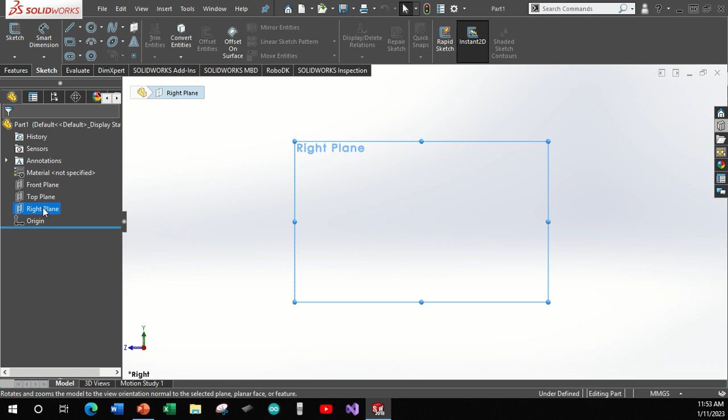Okay, in this video we are going to design a bearing, and the size of the bearing is 55. 55 is inner diameter, 68 mm is outside diameter, and 7 mm is thickness of the bearing. So we draw this at right plane. So Z axis should be on the right side, right? So let's go for the sketch.

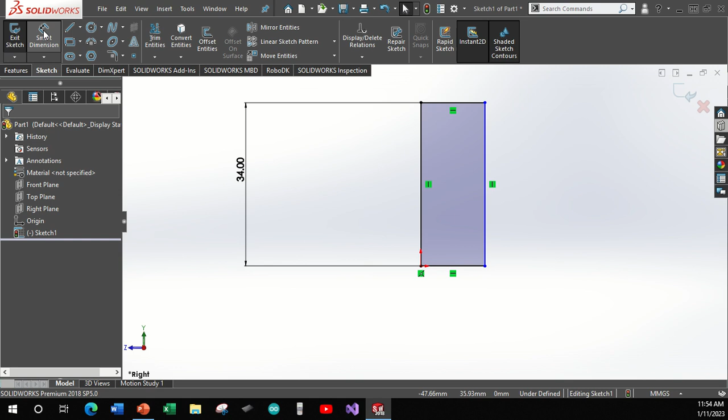Let's use the rectangle tool. Okay, so the dimension of this size should be 34. 34 times 2 is 68 mm. So this one, the thickness of the bearing is 7 mm.

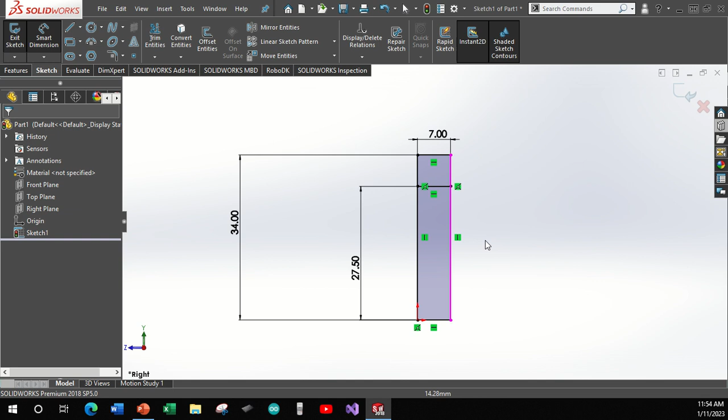So now I have to make a line for the inner side. So the dimension, this will be 27.5, because 55 mm is the inner diameter in the bore.

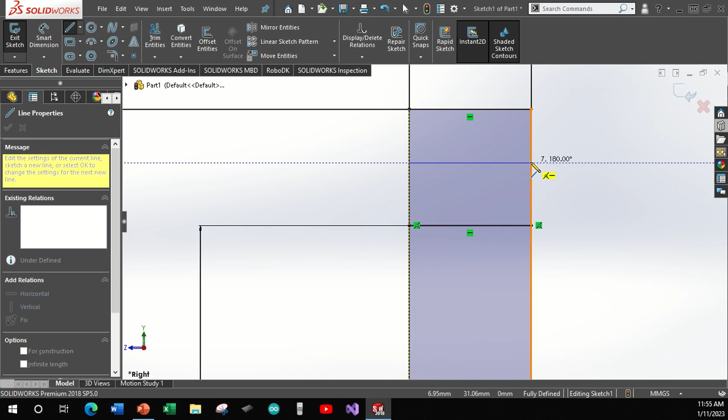So now I have to make a circle for the bearing. Let's make it 3.27 and make it a construction. So let's have a circle. The ball bearing is of 3 mm, so I'm gonna have 3.3. It's a tolerance according to my printer, so 3.3 mm is okay.

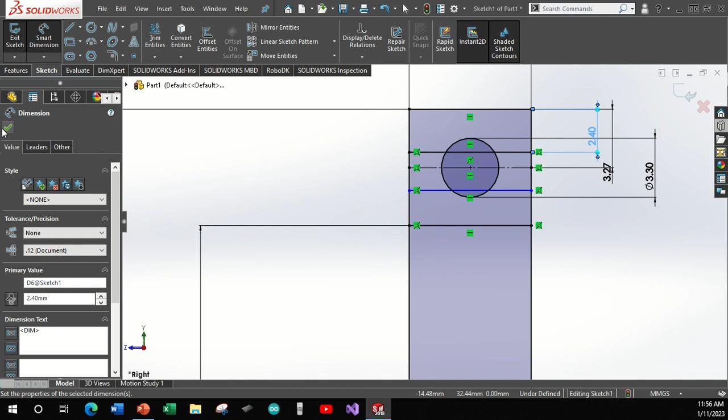I need two more lines, one here and one here. Let's have the dimension of these two lines. It should be 2.4 mm, and this should also be 2.4 mm. So this is now okay, and this is close.

Okay, what I'm gonna do is actually I have to make it a bit - remove this one, make it 6 mm.

I have to design the middle cage. So the spacing between these two is 0.37 mm, and the spacing between this one and this one will be 0.33 mm. So this is not close. Let's close this one, this one, 0.5.

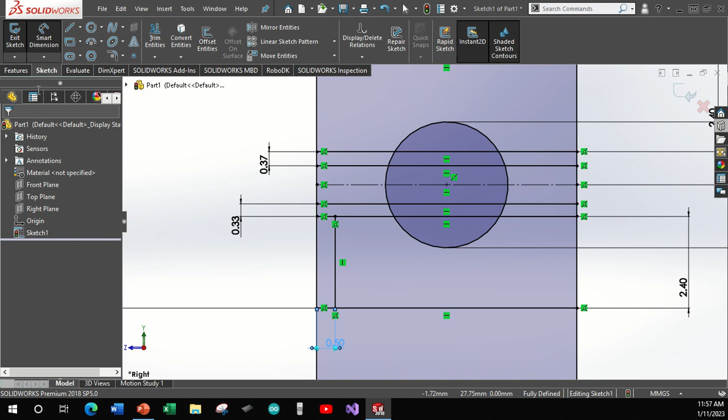So let me trim some areas. I'm going to trim this one, trim this one, trim this one, trim this one, trim this one, and okay, trim this one as well, this one, this one, this one, and this one, this one, and this one.

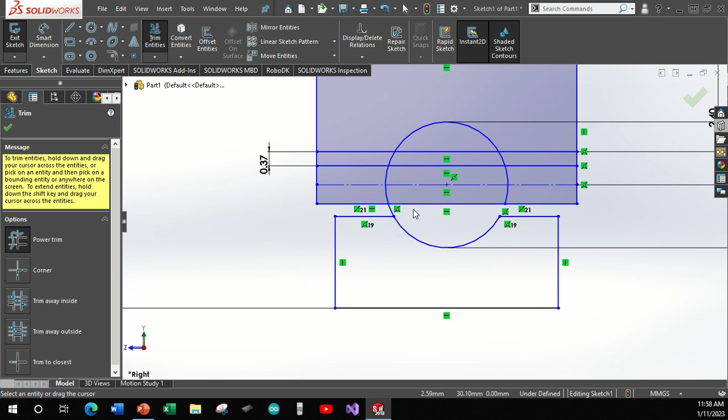So this part is actually the inner part of the bearing, right? So let's go to the outer side. Remove this side, this side, this side, this side, and this side. So this is the outer side.

So I have to now complete the carrier of this bearing. So what I'm going to do, I'm going to take this one from here to here, so I'm going to trim these entities. This is okay.

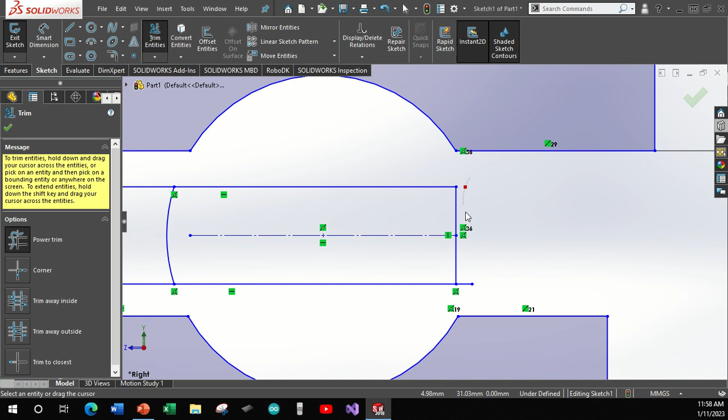Let's show the dimension of this one. It's 1 mm, it's okay. This is of 1 mm, and I have one more line.

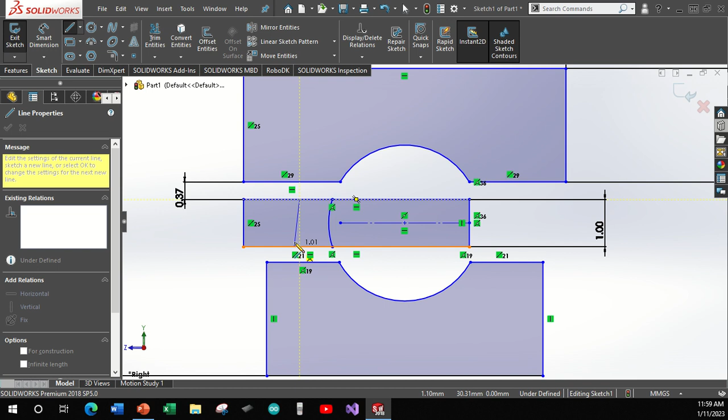I take the dimension of this and this circle. This should be of 2.75 mm. So let me trim these entities, also trim this one and trim this one as well. Let me cross check the dimension of this one and this one. This is 1.4, it's perfectly fine. So this part is the outer ring of the bearing.

This is the inner ring of the bearing, and this is the balls carrier. So this bearing can actually carry 3 mm ball. So I have chosen the diameter of the circle as 3.3 mm, for the tolerance and according to the printer, you can adjust this one, right?

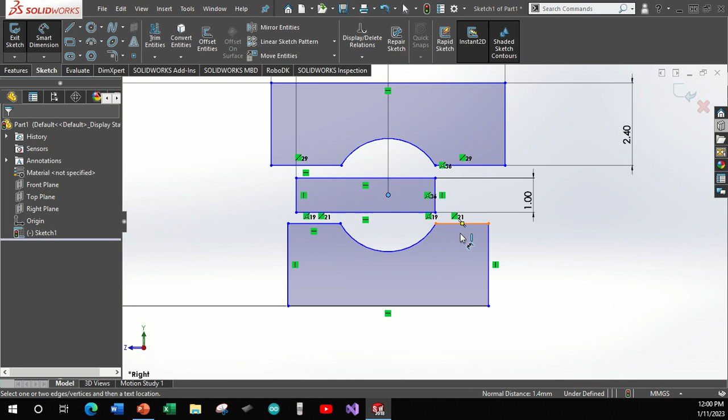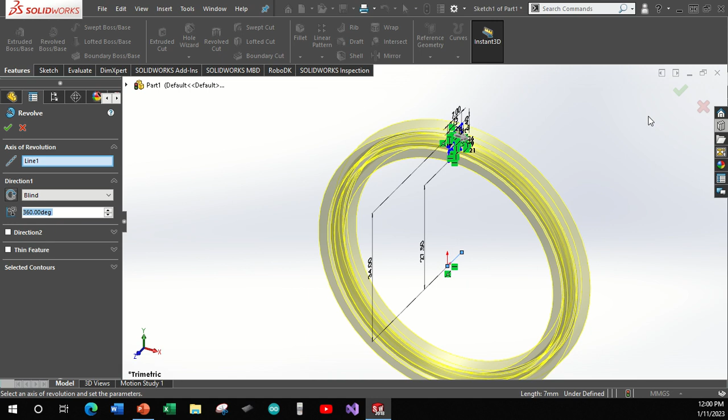So now let's actually revolve this one. Let me just trim this in - no, I'm not going to trim this one. Instead, I'm going to make it for construction because I will revolve around this one. So it's called revolve, and then it's okay. So this is a bearing, right?

55 cross 68 cross 7 mm. So I have kept this, I have kept some distance. I have kept the thickness of the outer ring as 7 mm, inner ring as 6, and the carrier has a lesser thickness, so that there should be no friction or body contact between this bearing and this bearing. So let's say this one.

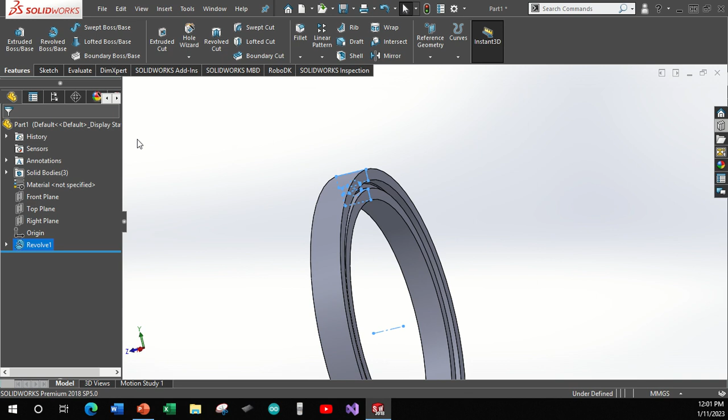Let's say, let me just have a new bearing 55 cross 68 cross 7. So bearing 55 cross 68 cross 7. I have to split the three parts, and I also have to make a cut from where I can insert the balls, right?

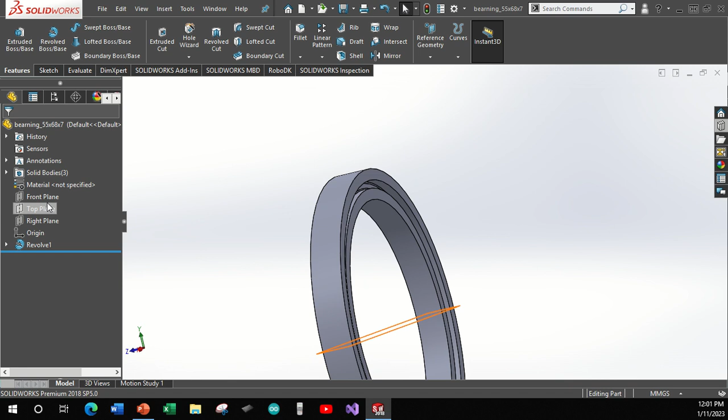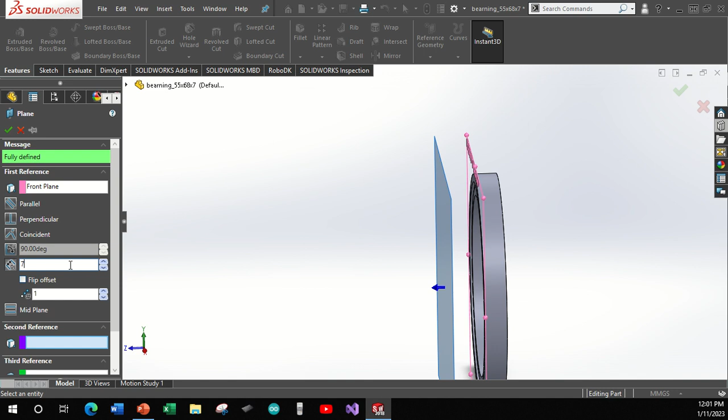So let's just go this one, either this side, or what I can do is actually reference a plane. The next plane should be at 7 mm. The direction is exactly opposite this one.

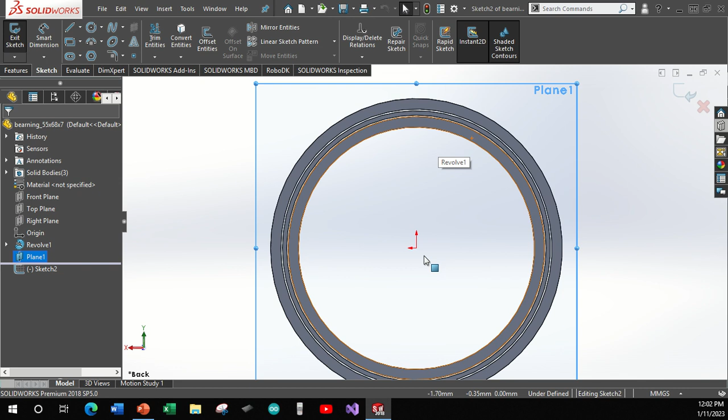So plane, this is sketch, we have normal. So the outer is 68 minus 55 is 13, divided by 2 is 6.5.

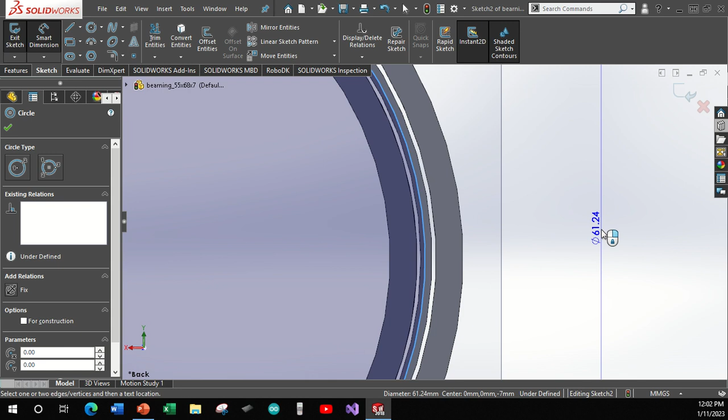I have to draw a circle for cut, something like here. So I was doing calculation, 68 minus 55 divided by 2, 6.5 plus 55 is 61.5. So let's make it 61.5, and choose actually construction for this one.

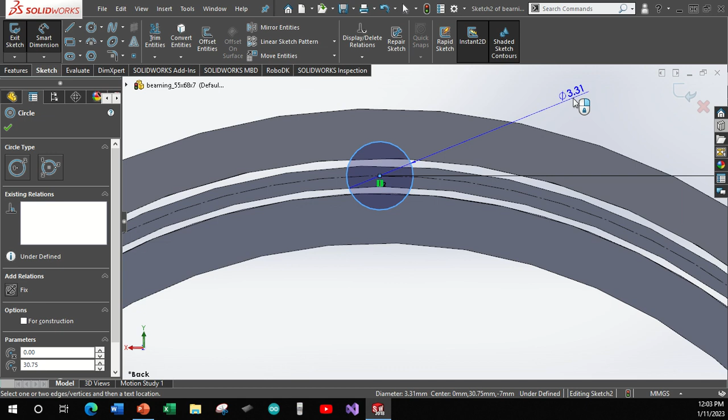And now I have to choose this one as - this is also 3.3, it's okay. Let's choose a cut. Extrude cut, and in this direction this should be of 3 mm approximately so that it can cut the surfaces - 3 or maybe 5.

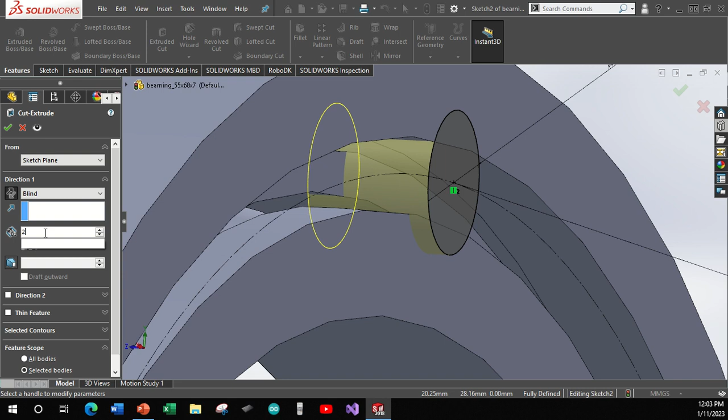No, actually, I will not cut here. Let's leave it for now. Let me save this file first. Save as inner outer, because I'm going to make a change in this one.

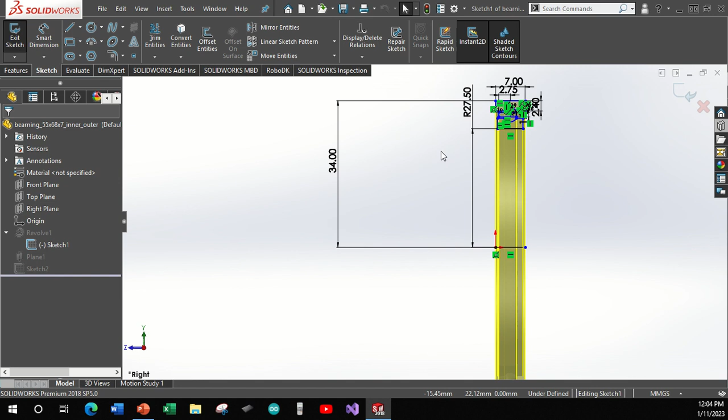Sketch, first take this one, edit. I have to make a cut for balls to be inserted, so I'll remove the inner carrier. Okay, so now we have only the inner and the outer side.

So sketch, edit. This is a feature, cut. This is 3 mm, this side. Okay, so now I can easily insert balls from here, right? This is okay, so this is inner outer.

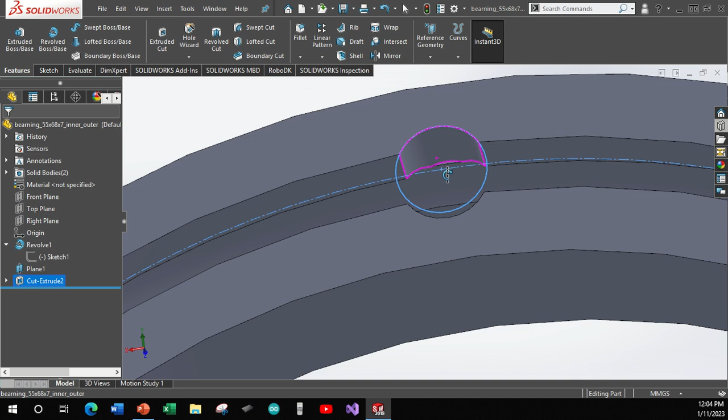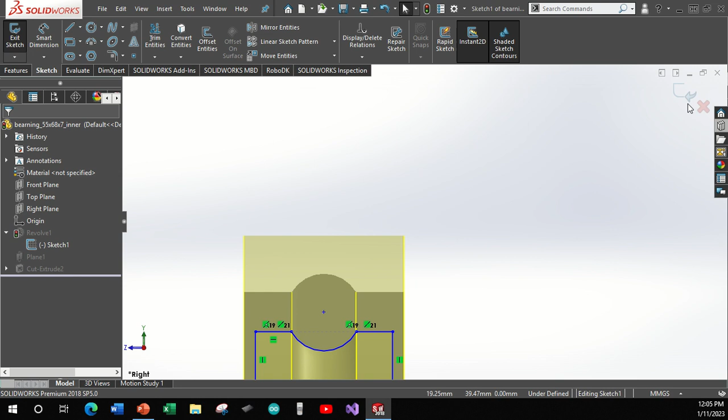Choose save and save as. So go to STL and then okay. So inner side is done. So let's go for the outer side.

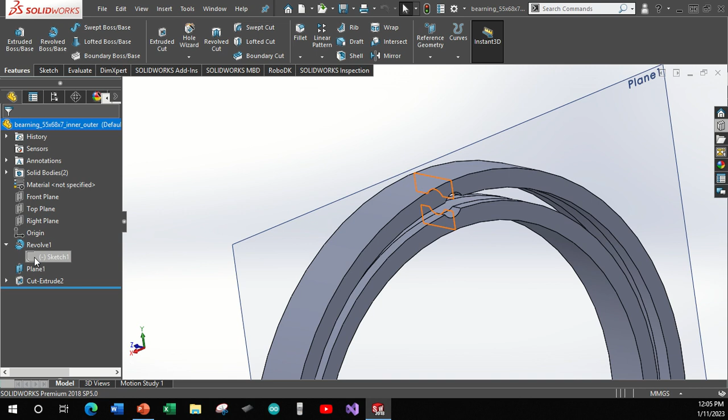So okay, so this is inner. Let's go to the inner outer. So this is inner outer. Now I have to extract the outer side. So sketch. Okay, so trim increase, oh sorry. So I have to trim this one there, but I have to extract the outer one. Done.

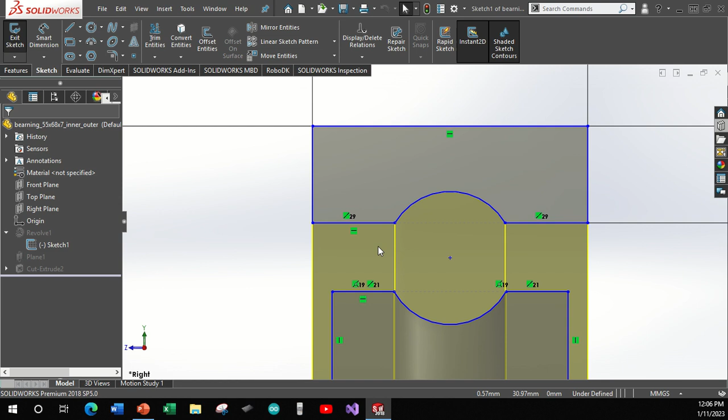I think there's a cut that I'm saying. Let me just first save it. Save as, only the outer ring. So this is the outer part.

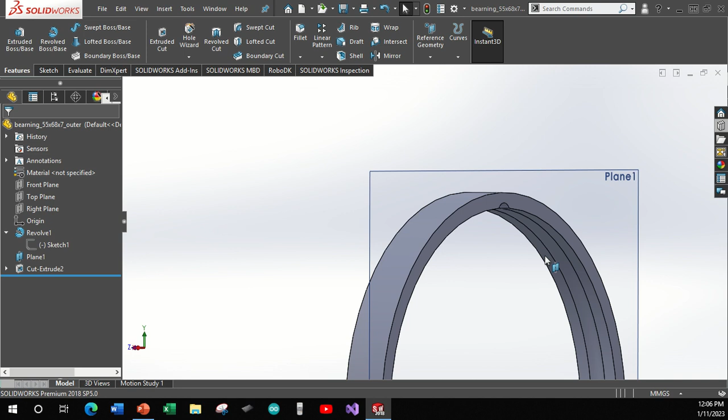So let's save this one. Save as STL, and this is the outer part. Now we're done. So I have to take the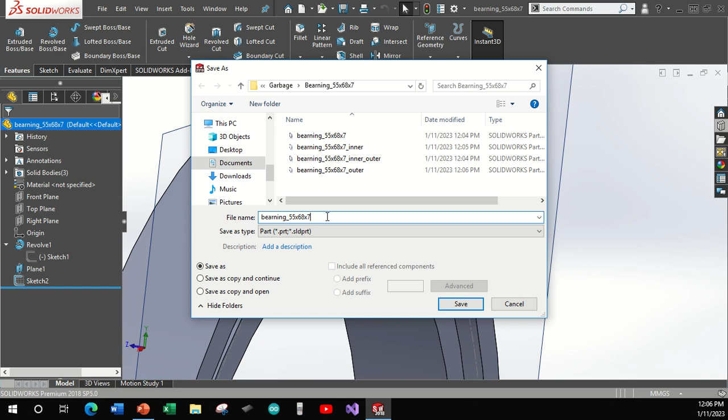Sketch and save as carrier. So this is carrier of the balls. Sketch, edit, trim. Okay, so trim all of these entries. These entities will be trimmed.

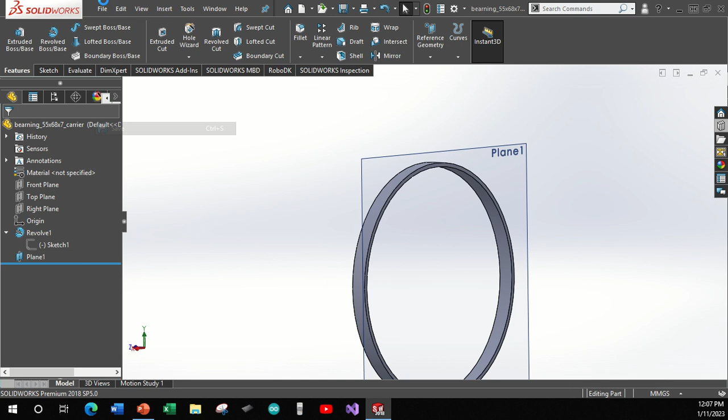Okay, so I'm left only with this. I don't need this anymore. So for this one, yes, I delete. This is save. So right plane. Okay, so this is the right plane, and

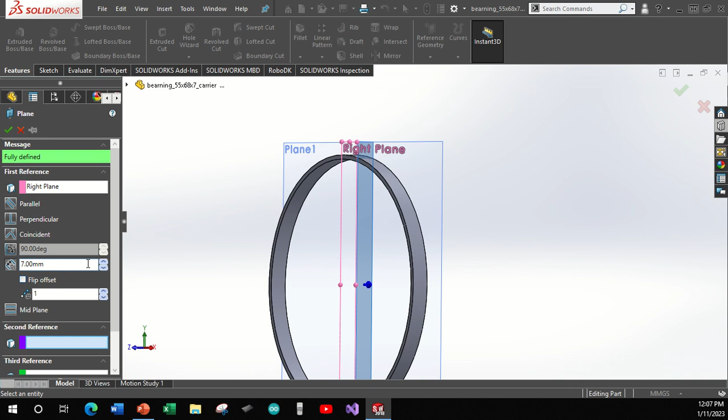I have to make another plane. This one, 31. Yes, this is okay. So this is plane 2.

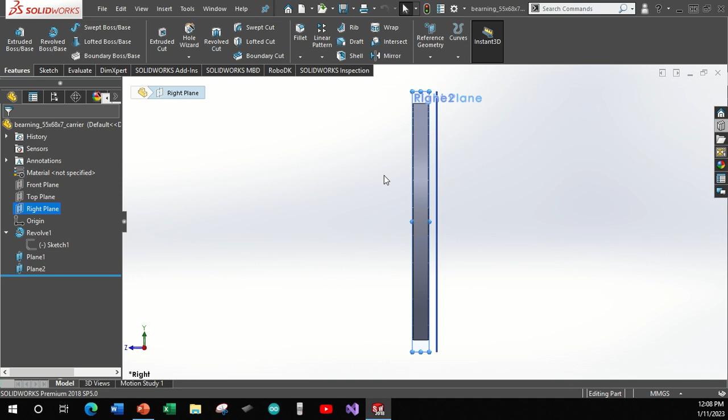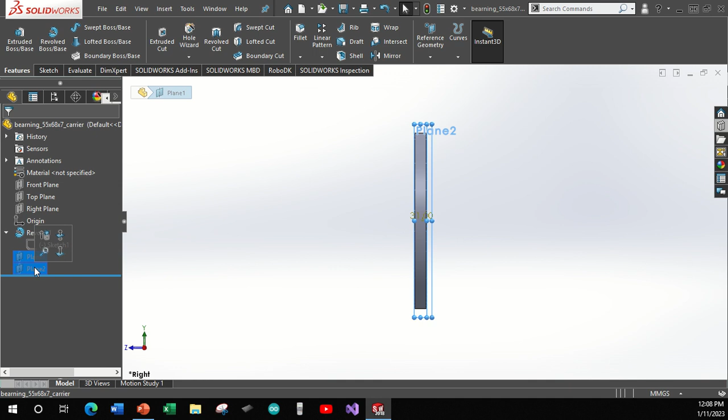So as for now, just to take the dimensions of this one, because I had already kept the distance. This is only for construction. So the distance of this line should be 2.75 as I have already set in the original drawing. So this should be of 3.3 mm. Okay, so extrude cut.

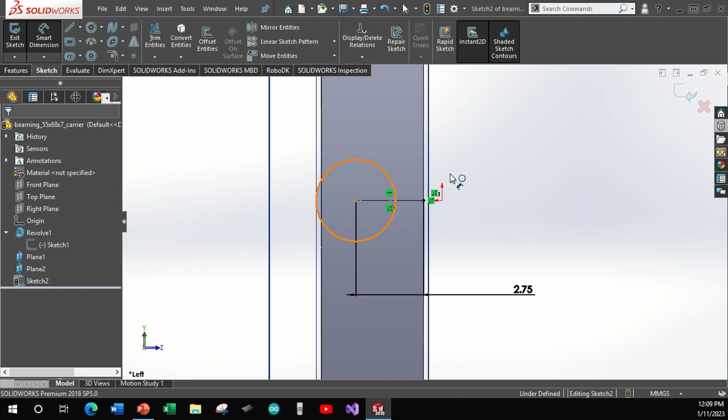And, oh okay, so this is the case. So circular pattern.

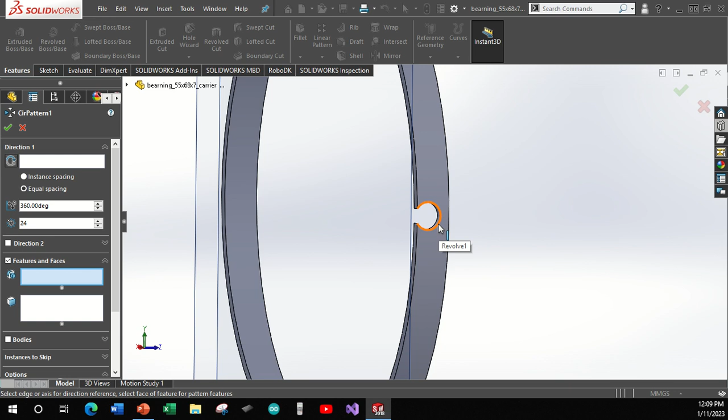Select this one. Circular pattern, this is the surface. So I'm going to choose 24. 24 balls I will insert here. So this is our carrier.

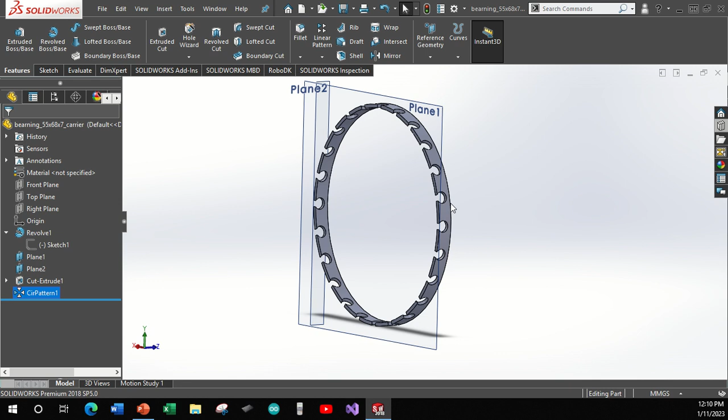So now I have designed it like this one. So if you insert the ball, it will not be ejected from this one, because in the previous iteration I have kept the distance of this carrier here. So I have made it more thinner. So the ball was being ejected during the testing.

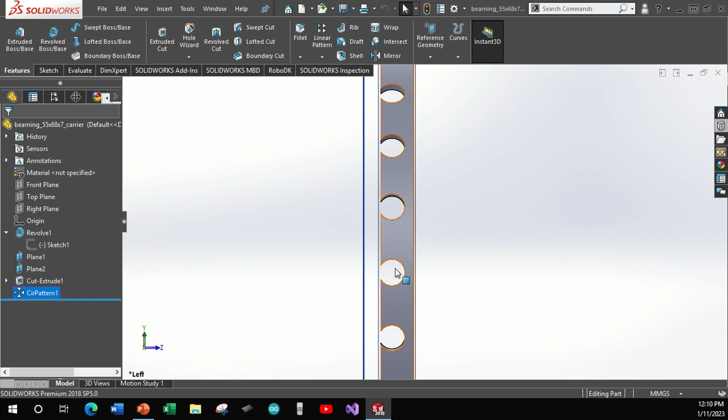So this is done. So we can save as STL. So all of these files are there. So let's go to Cura.

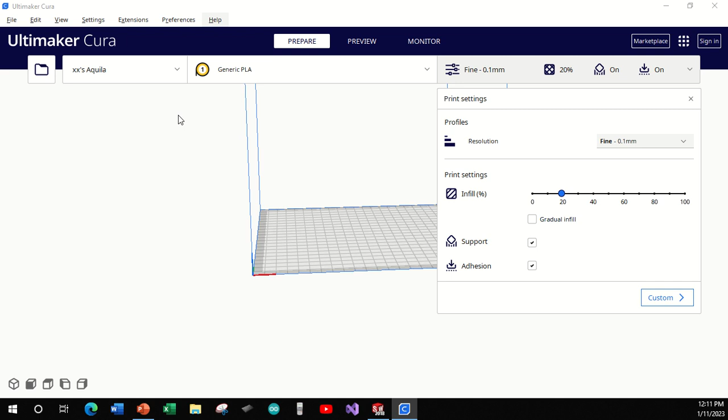So this is bearing. So let's go for the outer one first. So this is outer. So here we have the cut, so I can rotate this one. Okay, so now it will be okay. Oh sorry, so I'm gonna get rid of the support and 20% fill is okay. Okay, so let's go for the slice.

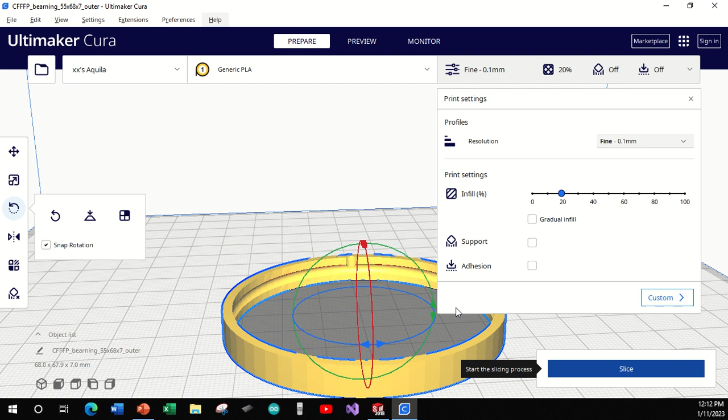Okay, so this is done, so I can save it to the disk as well. So new project, yes, and then the inner one.

So where's the cut? Oh, here's the cut, I found it. So I flip this one. So there's no adhesion at all. 20% fill is okay, let's slice. Okay, so I can save to the disk as well.

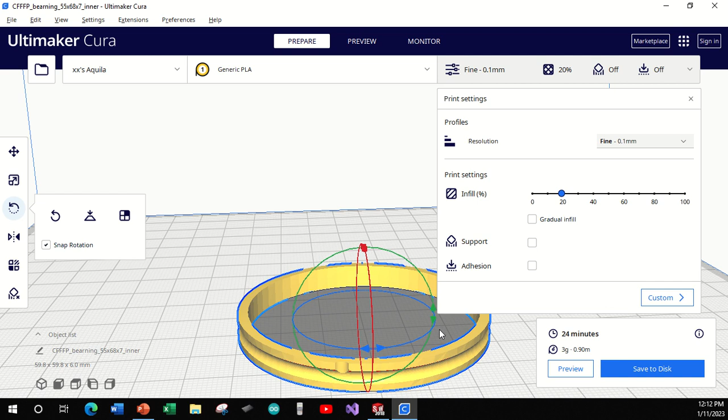It's a new project, and carrier. Okay, so this is carrier, so I have to flip it as well. So this one actually should be flipped like this one, and 20% is no adhesion, and slice. So let's print all this and then meet again.